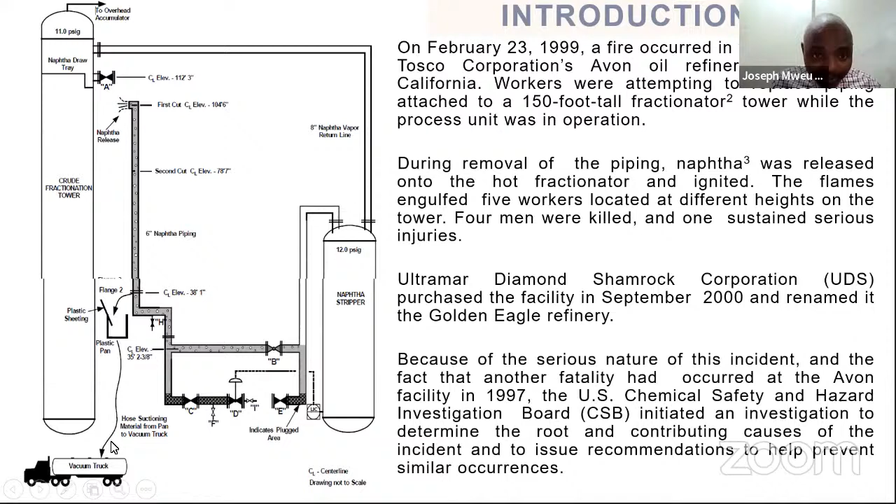So after that, you can see again the causes of the incident, which happened on February 10, 1999. There was a pinhole leak, and it was discovered when the crude unit on the east side of the top elbow of the naphtha piping, where it was attached to the fractionator, 112 feet above grade.

In this area, when they were able to see the pinhole leak, the TOSCO personnel responded very quickly so that they could be able to try and isolate the piping. At this time, they were trying to isolate the piping. Remember, the unit is still in operation.

Now, they had to do something more, inspection of the naphtha piping. You can see here, where I'm moving my cursor, we have the naphtha piping here. When they were trying to do the inspection here, they were able to see that there was too much extensive thinning and corrosion. An urgent decision was made so that they can be able to replace this large section of the naphtha line, so that they could take care of the thinning and corrosion which was observed.

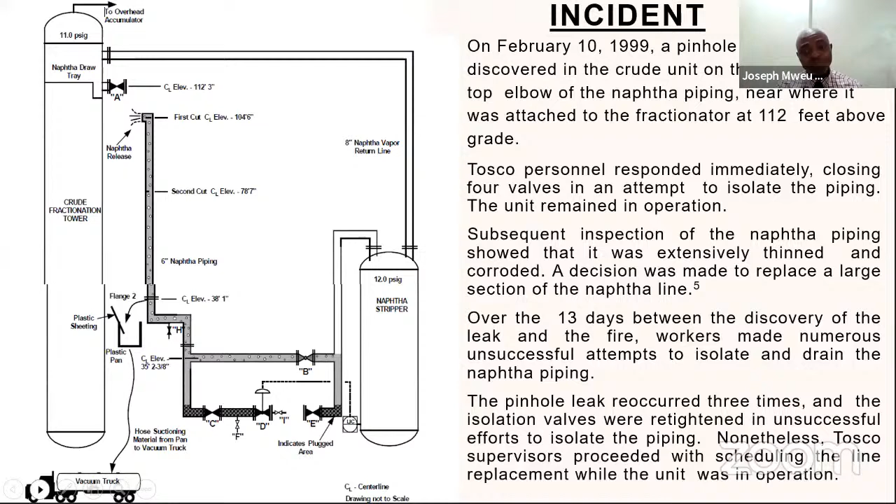They tried to just replace whatever they could replace so that they could at least continue with the job. Activities in refinery projects are very, very sensitive, and without proper coordination, it's not easy at all to be able to succeed in doing them. So let's come back to the incident.

On that day of the incident, you can imagine this piping of the naphtha had approximately 90 gallons here.

Luckily, on that day, a work permit authorized maintenance employees to drain and remove the piping so that they could rectify the problem, which was the leaking.

So what happened? They tried several times to drain the line, and because they were not able to do it, the maintenance supervisor of TOSCO directed the workers to make two cuts into the piping.

When the first cut was made, nothing happened, because as you can see, the first cut happened on top here, near the naphtha release area.

So they did the second cut here. When they did the second cut, naphtha started leaking.

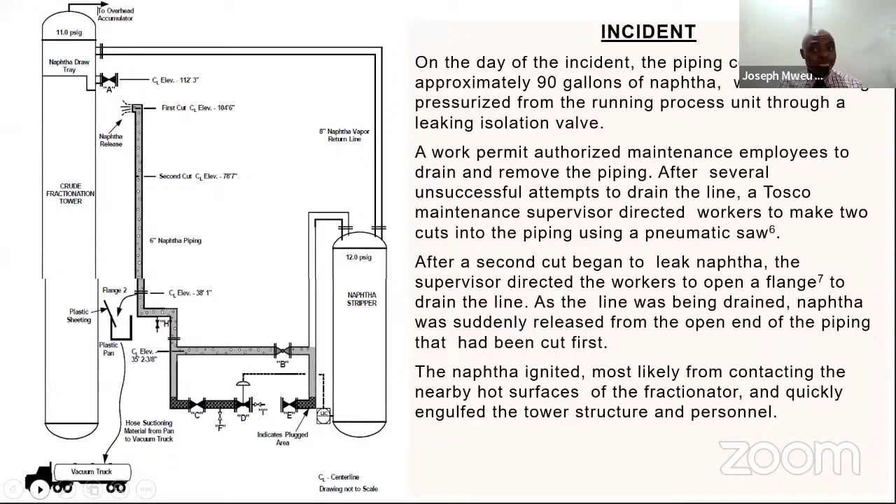After this, there were key findings when the investigation was conducted by the CSB, and they gave some findings which we are supposed to discuss.

They said that when removing the naphtha piping in the process unit, we must understand that this operation involves very significant hazards. Once again, this job was non-routine. There was no shutdown; they just went ahead to do it when the system was in operation.

Remember, they were removing all that naphtha a section 100 feet long, and the piping was 6 inches. Remember, naphtha is very flammable, in fact highly flammable.

So when these workers were conducting the removal, they were positioned as high as 112 feet above the ground. If you are at that position, you don't have any way to escape. You are suspended somewhere - it's not like being on the floor where you can escape and run away. You are suspended at that height.

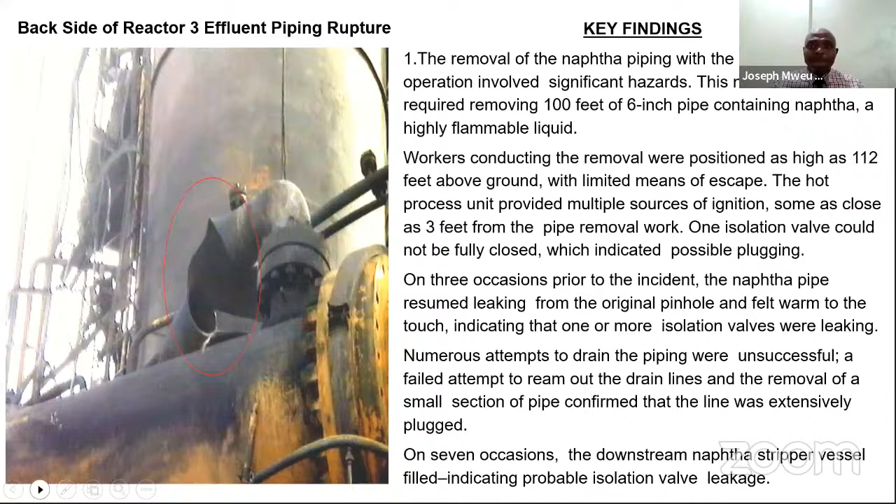You will agree with me that we had discussed about one of the naphtha pipes which was cut during the repair work. Everybody, including the supervisor, knew that that pipe contained flammable liquid.

TOSCO themselves had procedures in place, but they were not following them. There was one procedure particularly which gave guidance about piping, draining, depressuring, and flushing prior to opening the system so they could drain or remove the naphtha. They had the procedure, but unfortunately it never specified any alternative course of action if there was a problem during the draining.

They were all aware that the hot process equipment was close to the removal work, and the procedures available, plus the safe work permit, were not able to identify the ignition sources as part of the potential hazards. Also, the permit failed to identify the presence of hazardous amounts of benzene in the naphtha.

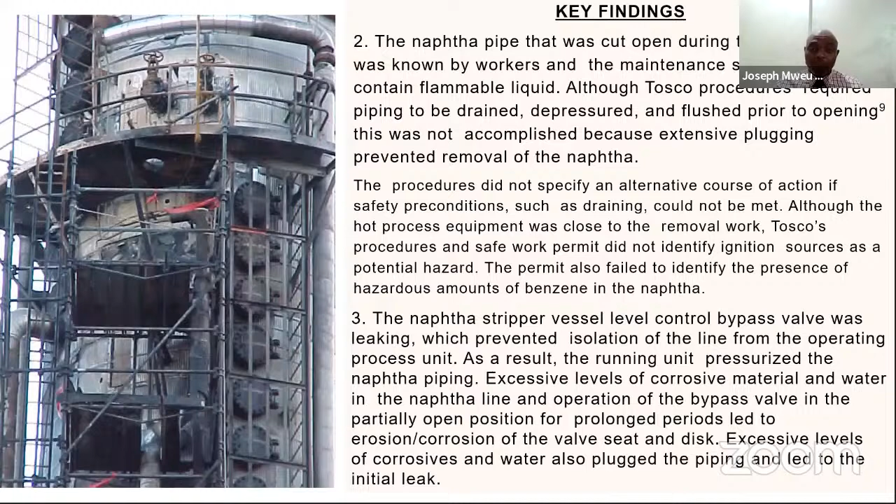TOSCO's job planning procedures never required a formal evaluation of hazards, which would have involved replacing the naphtha piping. In their own procedures, evaluation of the hazards had said that the pipe repair work was a low risk maintenance. And we all understand that any process activity or process repair work has never been low risk.

It has never been low risk, because it consists of very serious hazards which can cause inability to drain or isolate whatever naphtha is available there.

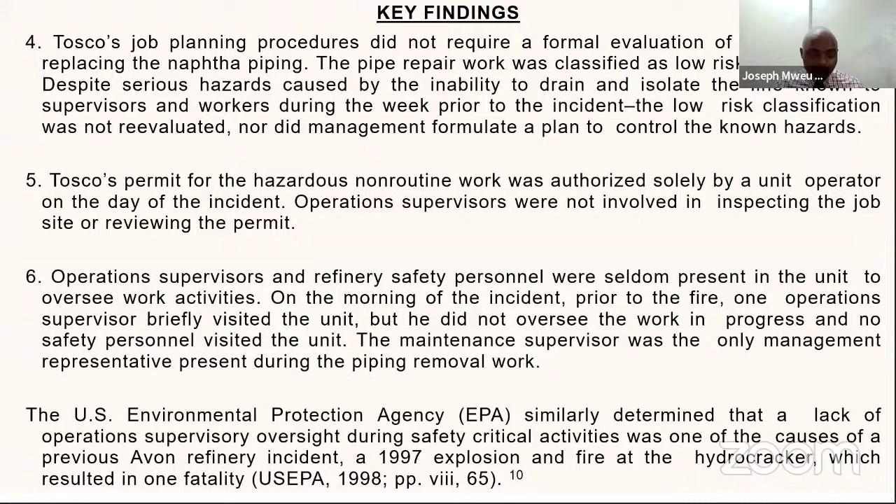We'll go to number 7. They also found out that in the 3 years prior to the incident, the corporate safety group of TOSCO and the facility management of AVON never conducted any documented audits of the refinery's line breaking. They never checked or documented the lockout, the tag out, any blinding, or any procedures and practices which were supposed to be followed.

This was found during the investigation of the incident. Now, there was also one last thing which was not done by TOSCO. There was no management of change.

They never reviewed the hazards which were available when the processes were changing, even when they were to operate the crude desalter, even when they wanted to do the designing. They never even knew about the excessive water in the crude feedstock, and they never had time to know about the bypass valve, which was partially open during the operation.

There were memos and incident reports from the TOSCO management which were very clear that the operational problems and the increased rate of corrosion was observed. However, they never did any corrective actions on time.

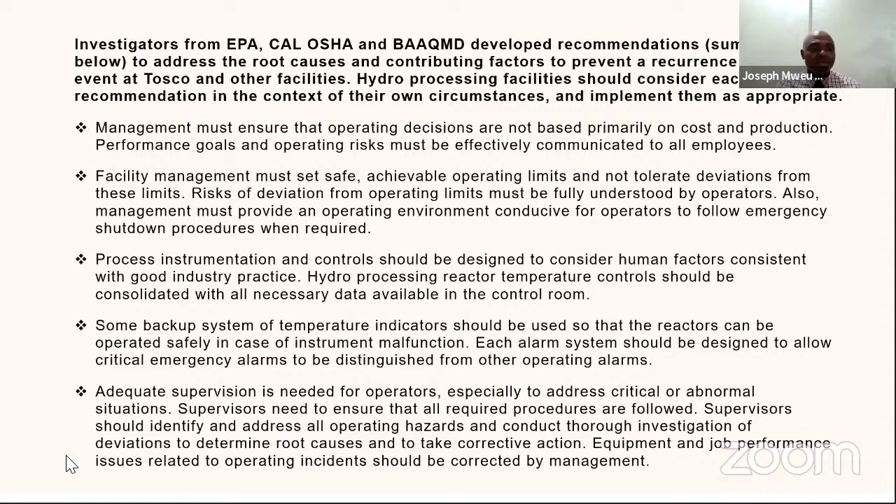We also need to ensure that all facilities maintain equipment integrity. If there is any problem with the operation, or if integrity is being compromised, the process should be stopped and an emergency shutdown is performed.

Remember, when we do an emergency shutdown of the equipment, we are not preventing production or escalating costs, but we are trying to save for the future. We are trying to make sure these same employees will be able to work for the company for a specified period without incident, and that the organization can work without any incidents that might cause problems from insurance requirements and such.

We must also ensure that management is aware that operators receive training about the operations of the process units and the chemistry behind them. There should be training including the reactions and what causes temperatures to rise. This training should be conducted for operators, and they should also be trained to understand the limitations of the process instruments.

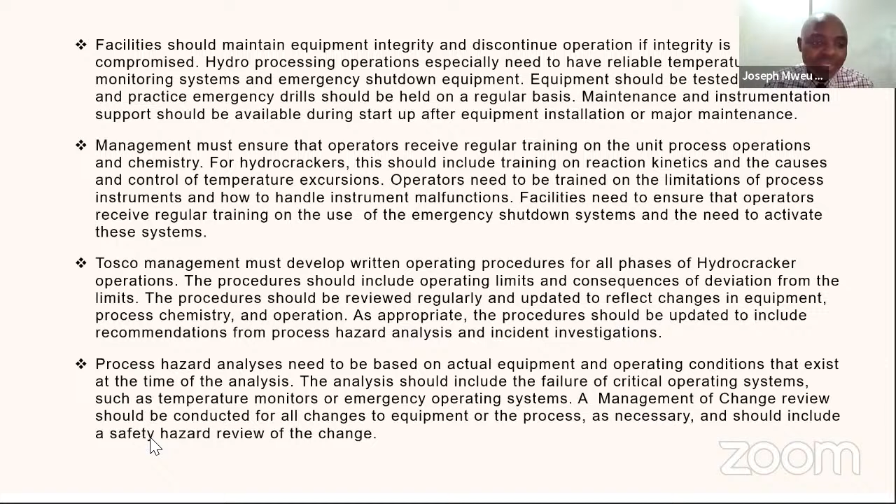Process hazard analysis has to be based on the actual equipment and operating conditions that exist at the time of the analysis. It should not exclude any critical operating systems such as temperature monitors or emergency operating systems. That is it, because the last two slides also speak about what I've discussed in the three slides before.

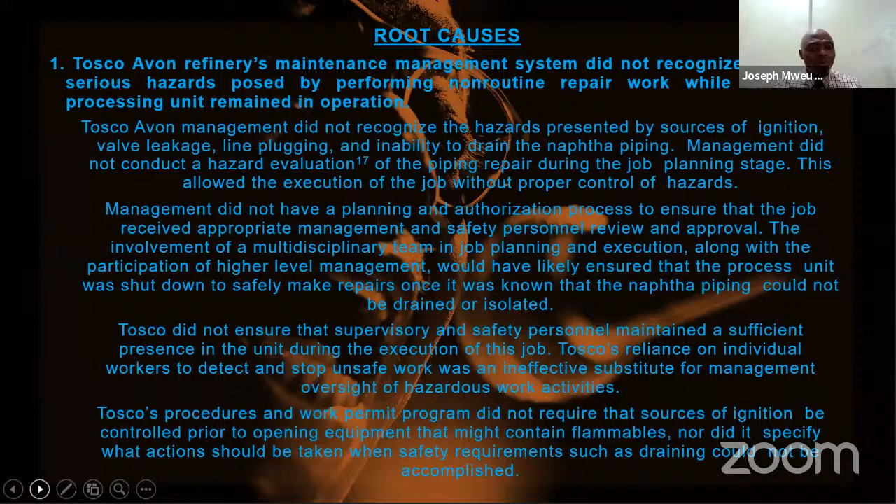This was the last conclusion. But as I conclude, we need to know about the safety personnel's job, and to ensure that all work we conduct in the process follows the safety requirements and process safety, so that we conduct jobs in a safe manner.